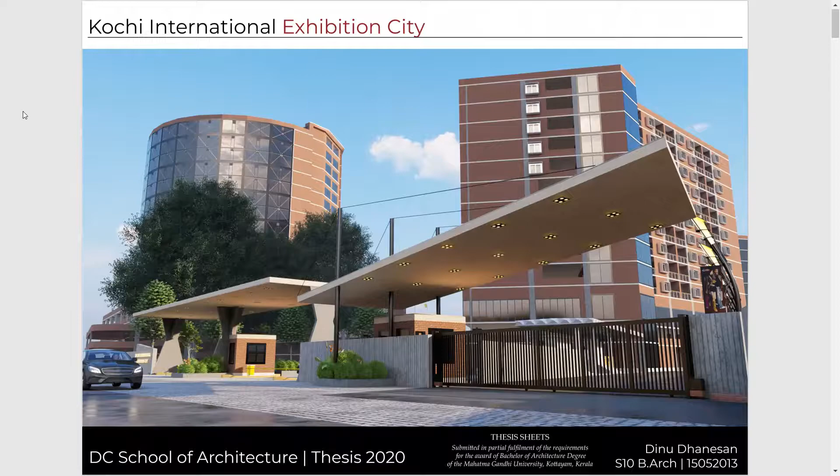The Kochi International Exhibition City is a live project proposal by the KSHB, also known as the Kerala State Housing Board, under the Government of Kerala.

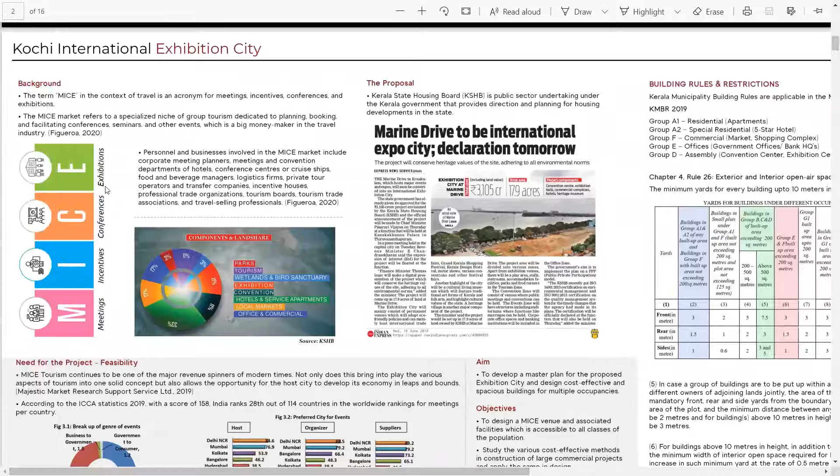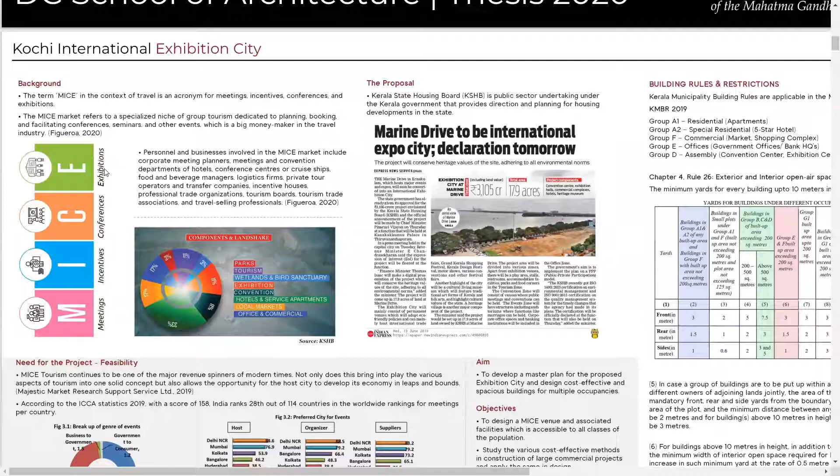It is a tourism-based project which comes under the MICE, also known as the Meetings, Incentives, Conferences, Exhibitions Market. The key components of this project as proposed by the KSHB include convention center, exhibition halls, commercial complexes, hotels, museums, serviced apartments, parks, etc.

Need of the project: MICE tourism is one of the major revenue generators of modern times. India is ranked 28th out of 114 countries by the International Congress and Convention Association for meetings and per country. Kochi is referred to as the commercial capital of Kerala and is becoming a sought-after MICE destination of South India. Owing to the rising demand and absence of such multifaceted large-scale developments, the KIEC, once realized, can expand the possibilities of MICE tourism in Kochi and the country as a whole.

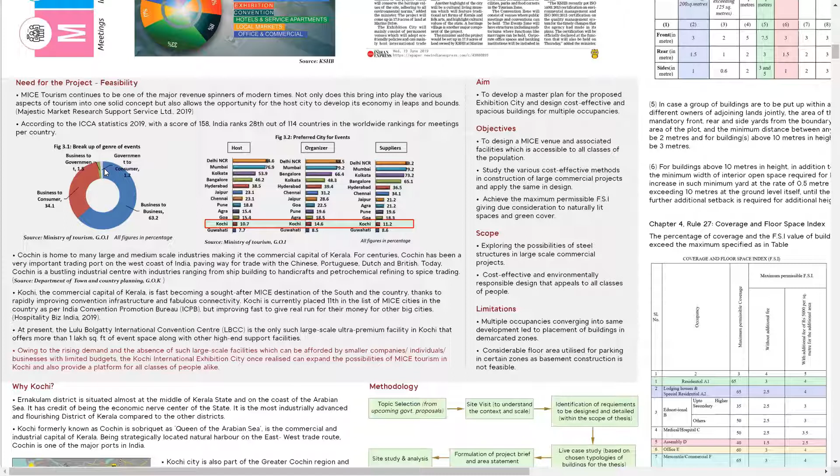So my aim is to develop a master plan for the proposed exhibition city and design cost-effective and spacious buildings, namely the residential, office, and exhibition centers.

The Kerala municipality building rules applies to this project, and these rules are considered pertaining to various occupancies, and the project is taken into consideration.

Coming to the case studies for the residential development, the first one is the Humanscapes Habitat, which is a community-based collective housing project based on co-housing concept in Auroville. It is a mixed-use development consisting of residences, community spaces, and workspaces. Some of the key inferences from this project include use of shared facilities.

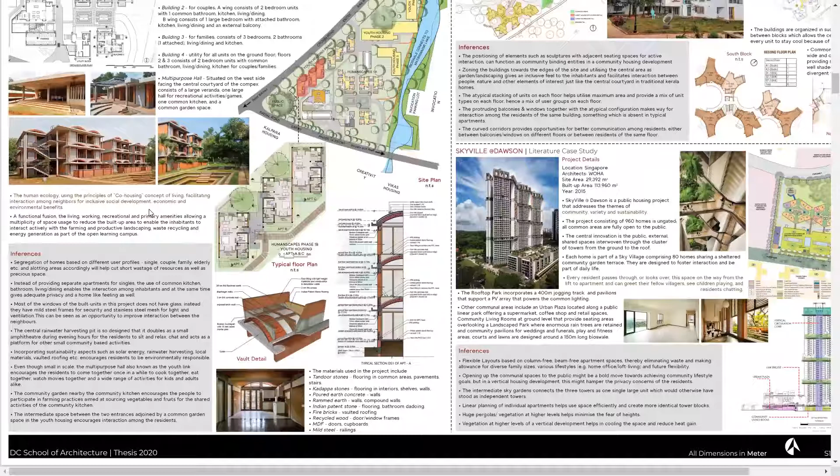Other inferences include segregation of built units for different user groups, and sustainability aspects such as solar energy, rainwater harvesting, and use of local materials. The second case study is Kalpana Housing, which is again a community housing project in Auroville.

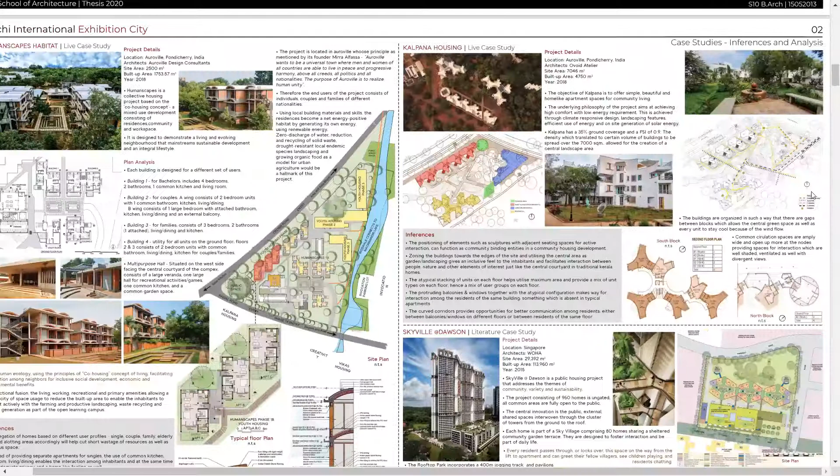One of the key inferences from this case study is the zoning of the built environments towards the edge of the site, thus creating a green oasis in the middle of the site which is pedestrianized and acts as a communal garden. The literature case study for the residential part is SkyVille at Dawson in Singapore.

It is a multi-story ungated public housing project which addresses the themes of community and sustainability. Key inferences from this case study include flexible layouts for apartments that are beam and column free, sky terraces, and communal spaces in between floors, and a rooftop park that is open to the public.

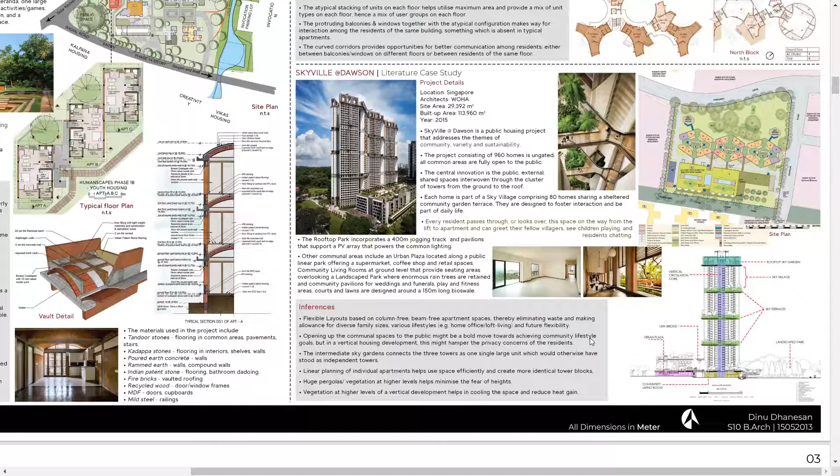In the comparative analysis, some of the key inferences or takeaways are zoning the built environment units in such a way that the green spaces are enclosed, and pedestrianized and shaded walkways or plazas are brought in between in the zoning.

Communal spaces along with horizontal access ways, circulation paths, etc. are provided. Visual connectivity within the building from different floors, and provision for natural light and ventilation in common spaces, etc.

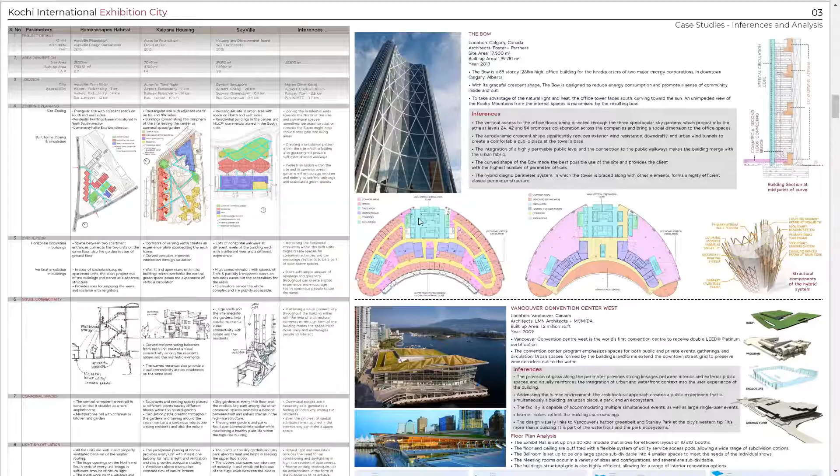The literature case study for the office tower is a 58-story office building in Canada called the Bow. The key inference from this crescent-shaped vertical tower is its hybrid diagrid perimeter system and the three intermediate communal areas.

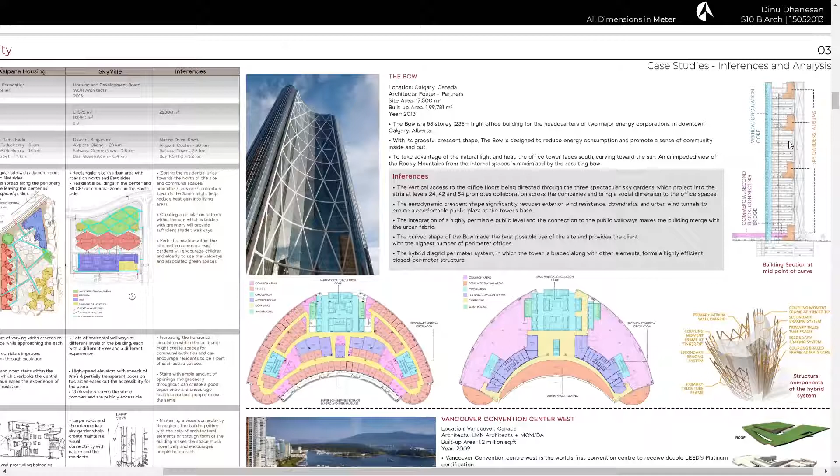The literature case study for the exhibition center is Vancouver Convention Center West, also known as VCC West. It is a 1.2 million square feet facility in which the architectural approach creates a public experience that is simultaneously a building, an urban place, a park, and an ecosystem.

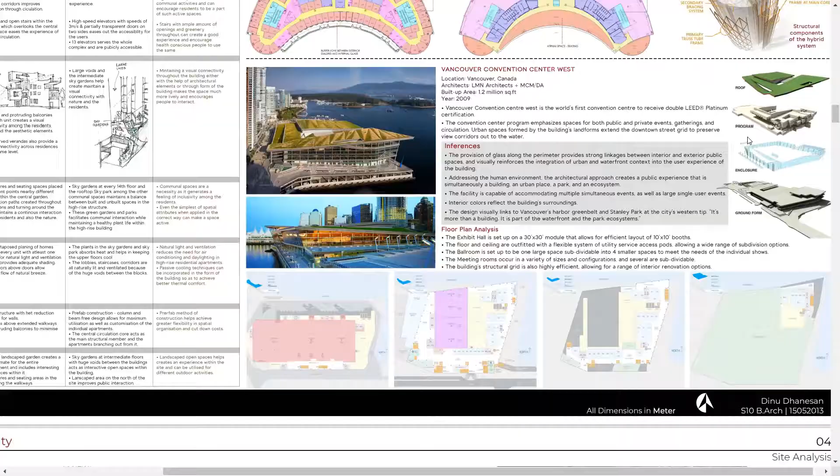Coming to the site, it is located at the Marine Drive in Kochi City in Ernakulam district. It is a connected site with all major modes of transportation within a maximum of 30 kilometers. Total site area is 17.9 acres, and this includes

almost 2 acres of mangroves, which comes under the CRZ1 buffer zone. It is a flat site with an average elevation of 4 meters above sea level. The existing vegetation in the site includes shrubs and trees belonging to the acacia family, Albizia lebbek trees, and

coconut trees. Since it's only 185 meters from the Kochi backwaters, the prevailing winds from the west and southwest are in abundance. There is a 10-meter wide city road running along the west edge of the site, and hence the entry exit to and from the site is located at the west.

Buildings in the immediate surroundings of the site include a petrol pump, a 2-story cultural building, and a 14-story residential tower, all in the southwest of the site. Good amount of sunlight and fresh air year-round is a major strength of the site.

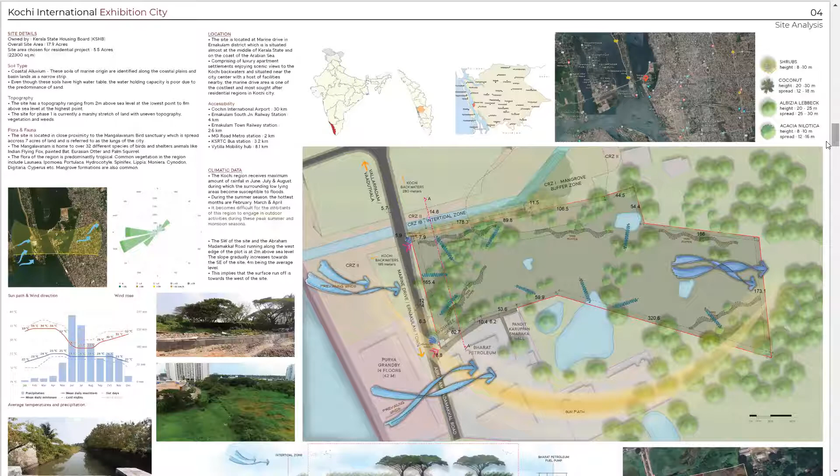Coming to the design program and the design brief. Since the original proposal is in its nascent stages, the exact area requirements and design brief were arrived at using a comparative study of areas of similar projects and case studies.

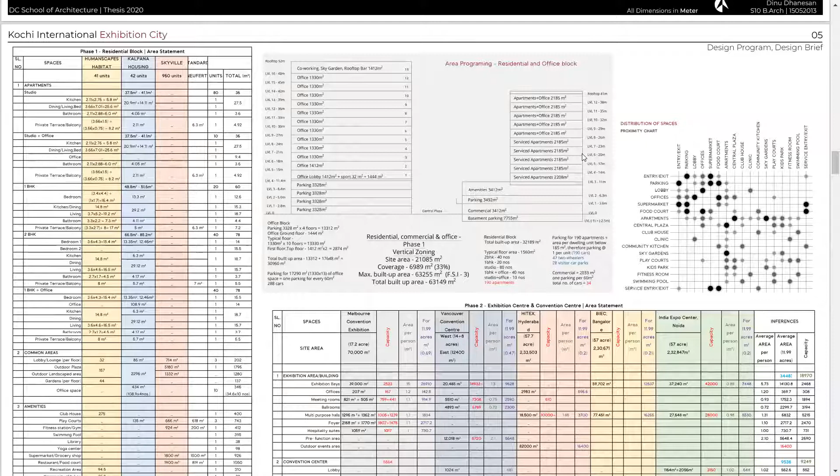Since the project is in Marine Drive, which is a premium locality, and the land prices are very high, due consideration was given to the area programming so as to achieve a design with areas similar to the maximum permissible FSI and coverage. At the same time, providing adequate amount of green spaces and public plazas were considered.

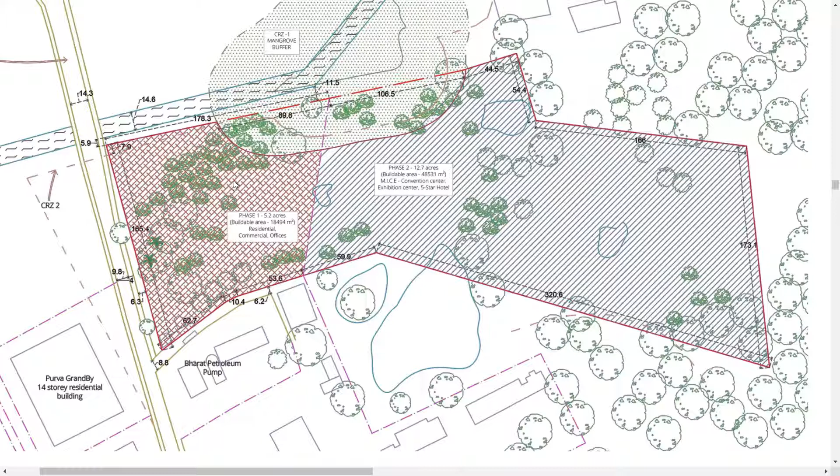Coming to the conceptual development at site zoning. In the basic site zoning, schematic site zoning, the site is divided into two phases, phase 1 and phase 2. Phase 1 is 5.2 acres and consists of the residential, commercial, and office spaces. Phase 2 is 12.7 acres and consists of the convention center, exhibition center, and 5-star hotel.

In the basic schematic master plan, the heritage plus cultural village, gardens, parks, etc. are zoned within the CRZ1 mangrove buffer zone, so that there are no built structures in this area, and also these areas can be used.

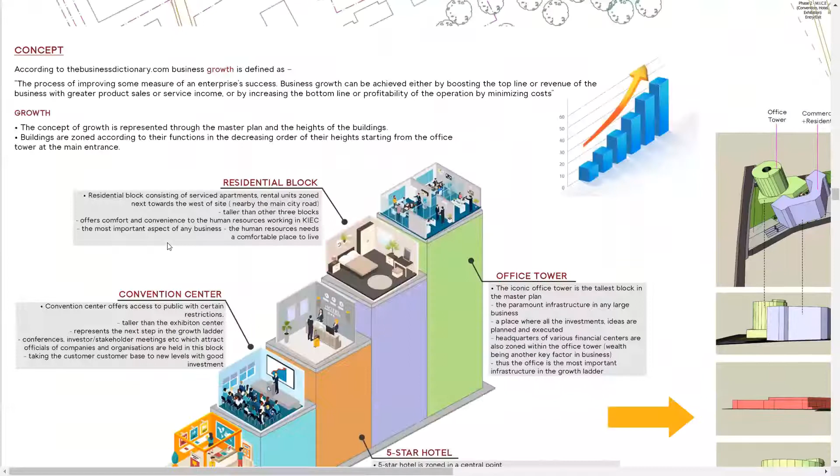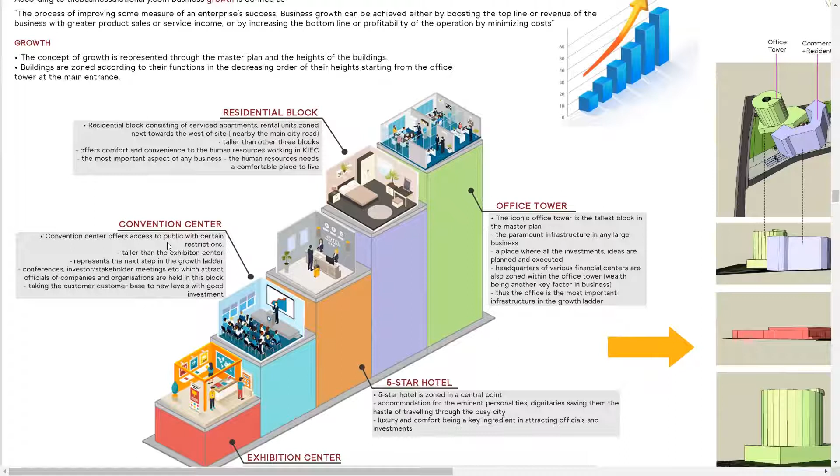The concept, zoning, and heights of the buildings are in accordance with the concept of growth. Growth is a widely used parameter in all businesses. Since Kochi International Exhibition City is a business venue, the concept applies to the same. Starting from the exhibition center at the east, the building heights gradually increase to the westernmost office tower, which is the tallest. The heights represent the infographic of growth.

As we can see from the massing study, the heights gradually increase from the exhibition center to the office tower in the west.

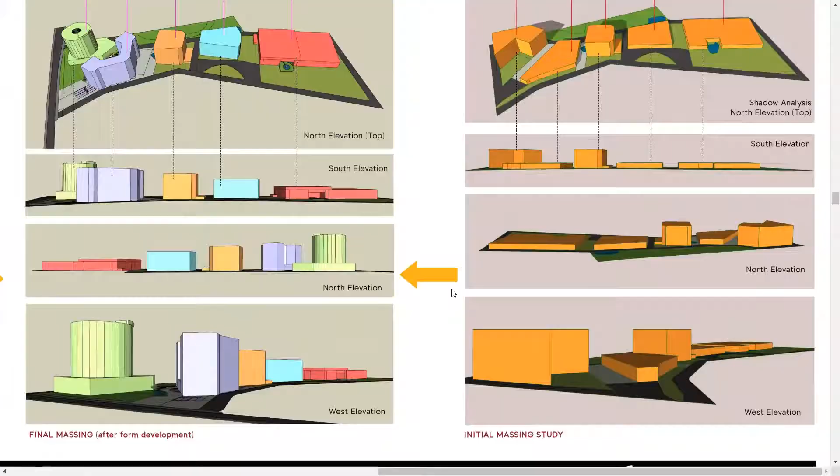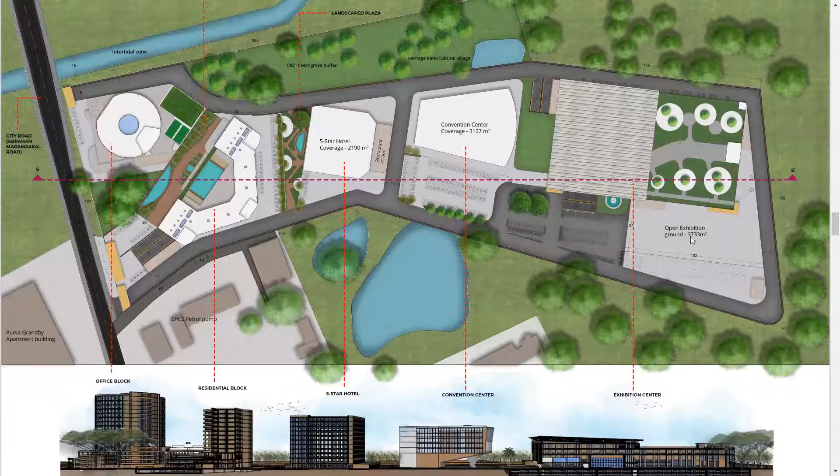Coming to the details of the master plan. This first one shows the existing vegetation and the CRZ buffer zone area, the park area, etc. All of the existing trees have been retained within the site, and only a single tree from the area near the office tower has been removed.

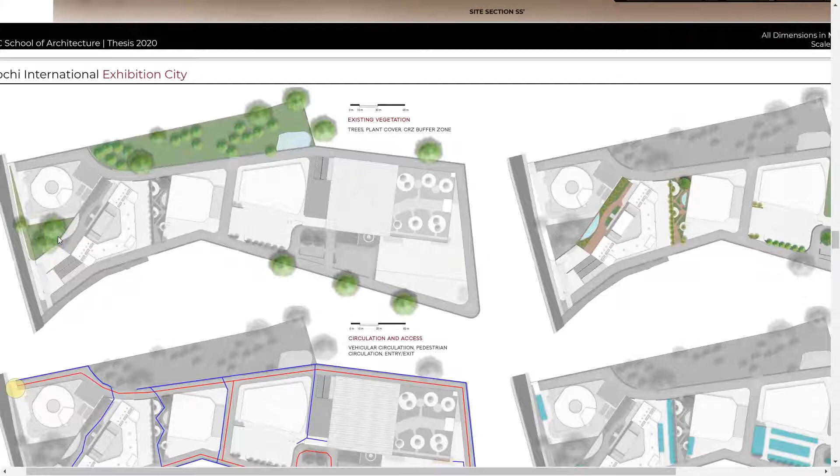This is the landscaped spaces of the plazas, which have been additionally added to the site. This is the public plaza between the office tower and the residential block. Then this is the landscape plaza consisting of seating areas, walkways, etc. between the residential block and the 5-star hotel.

This is the green lawn, and this is the rooftop of the exhibition center, which is again a landscaped meeting area.

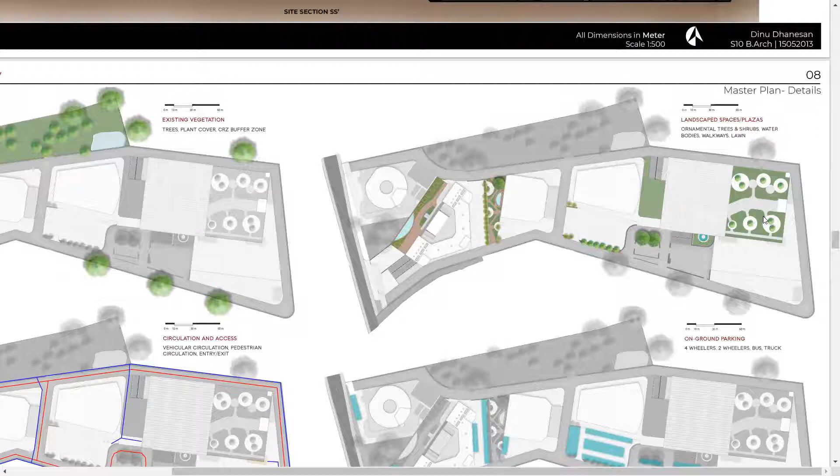Circulation and access points: there are 3 main access points to and from the site adjacent to the city road, and there is vehicular circulation throughout the site. There is a periphery road running along the periphery of the site, and there are certain areas which are pedestrianized, restricted to pedestrians only, such as this plaza, this landscaped area, and this lawn.

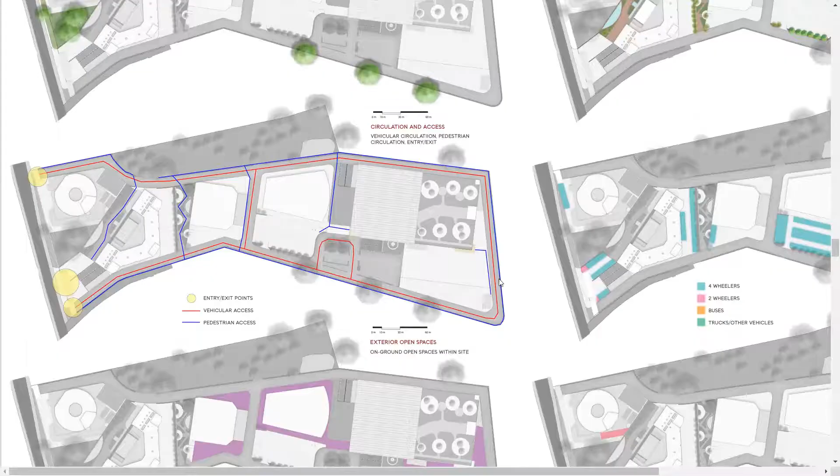This shows the on-ground parking spaces, that is for 4-wheelers, 2-wheelers, buses, and trucks.

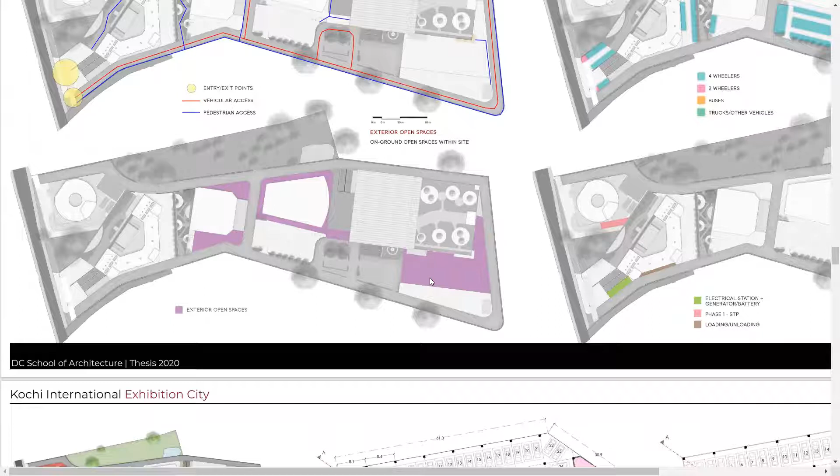This one shows the exterior open spaces, as on-ground open spaces within the site. There's a large open space adjacent to the exhibition center, which can be used for other open functions and also for truck parking, etc.

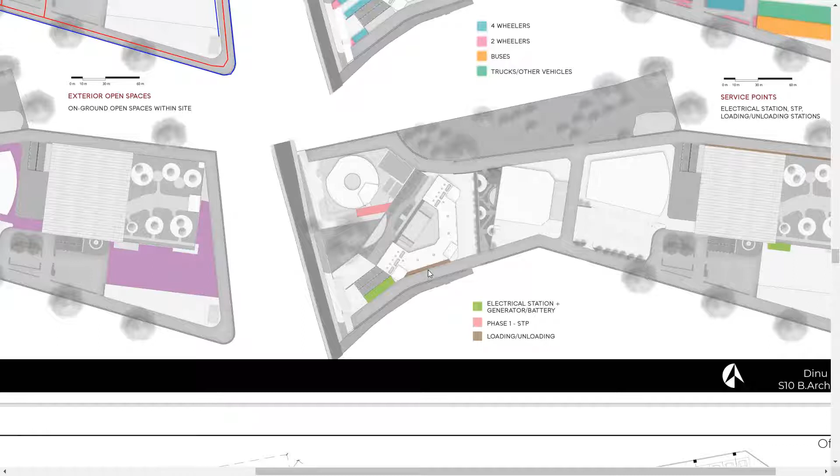This is the service points, electrical stations, STP, loading and unloading stations, etc. This is the main electrical station. The generator plus battery is located here near the residential tower, and this is the STP for the office tower, for phase 1. The loading and unloading spaces are for the commercial establishment in the residential ground floor of the residential block, and for the exhibition center.

So these are the floor plans for the office block. This is the ground floor plan consisting of 78 car parks. This is the typical floor plan for levels 1 to 3, which consists of 70 car parks each.

This is the level 4 plan, which consists of office spaces on either side, a central seating area and open space, and also 2 toilet blocks. The play courts open to the public are also located on this floor.

The typical structural system of the office block consists of a reinforced concrete vertical circulation core and composite columns in the central portion and ring beams. And on the periphery, there is a diagrid structural bracing system.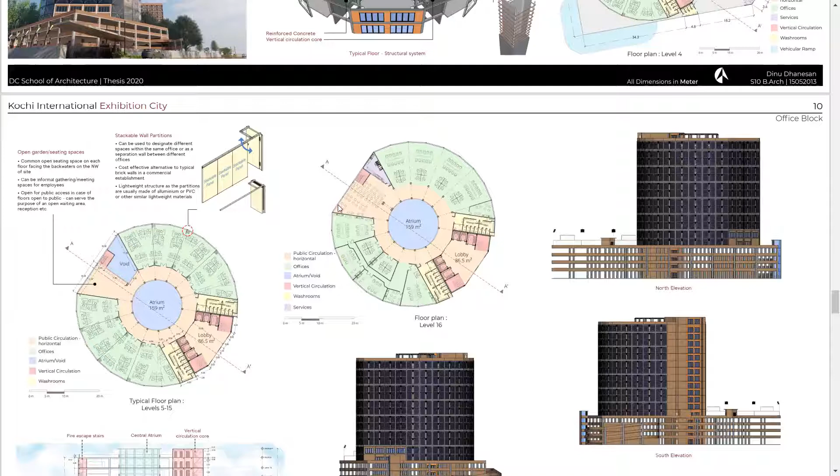Moving on to the residential block, this is the basement floor plan, which consists of 115 car parks. This is the ground floor plan, which consists of a supermarket and a food court, and also

the guest parking for 14 cars. This is the first floor plan of the residential block, which consists of 67 car parks.

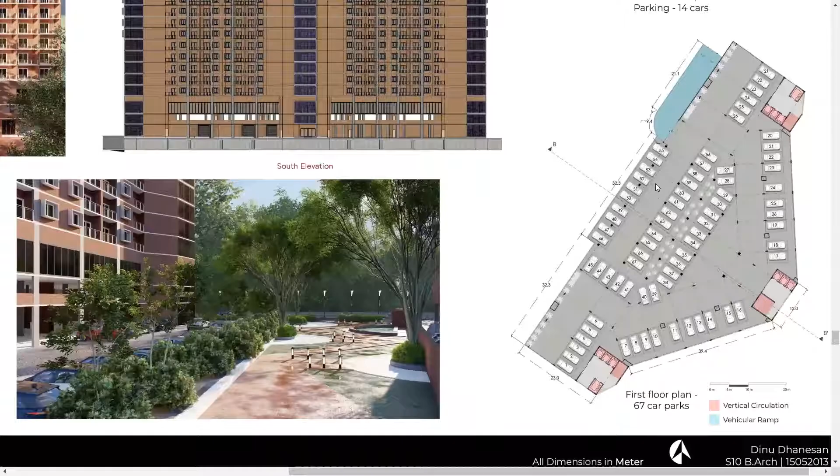This is the second floor plan of the residential block, which consists of communal spaces and services. The communal spaces include laundry, community kitchen, fitness center, swimming pool, clubhouse, yoga meditation center, library.

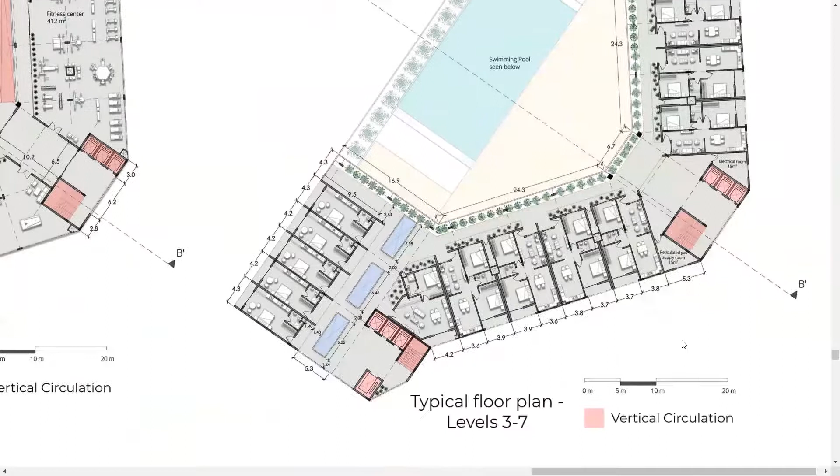The typical floor plan from levels 3 to 7 of the residential block consists of 8 2BHK units, 2 1BHK units, and 10 studio units.

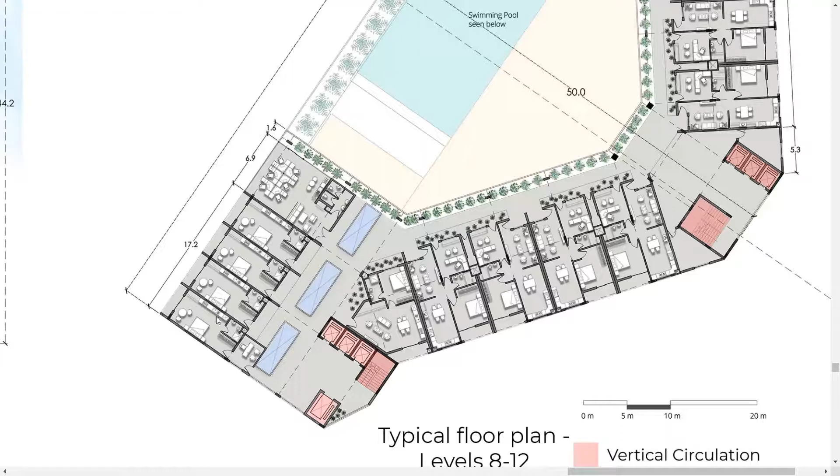This is the typical floor plan of levels 8 to 12 of the residential block, which consists of 1BHK units with attached office, about 8 in number, and 2 1BHK units and 8 studio units. There are also 2 additional co-working spaces on each floor.

Moving on to the exhibition center. These are the basement floor plans, which consist of car parks for over 1,100 cars. This is the ground floor plan, which consists of 3 large exhibition halls and a huge lobby, and also these exhibition halls have their own kiosks.

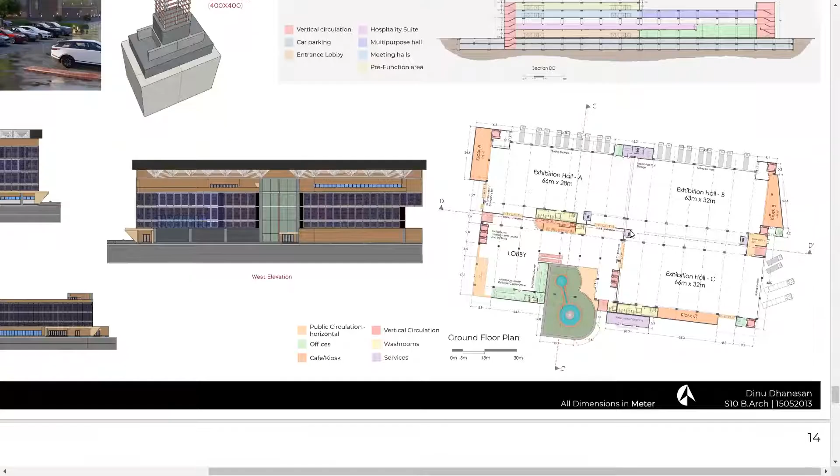This is the mezzanine floor plan of the exhibition hall. This consists of hospitality suites and organizers' offices.

This is the first floor plan. This consists of 3 multi-purpose halls, and one also doubles as a ballroom, and a huge pre-function area, which is actually shared by these 3 halls.

This is the second floor plan of the exhibition hall, which consists of a huge multi-purpose hall and also meeting rooms of varying capacities and sizes. There's also an open landscaped terrace, which acts as an open meeting space.

My special topic is building integrated photovoltaics. We all know that with the ever-increasing rate of global energy demand, buildings, both residential and commercial, are the major sources of energy consumption compared to any other sector. India also has high solar energy potential due to its geographic location and climatic conditions.

So the photovoltaic curtain walls allow buildings to generate additional power without compromising aesthetics, functionality, and views. They also provide thermal comfort and avoid the greenhouse effect. By avoiding the cost of conventional materials, the incremental cost of photovoltaics is reduced and its life cycle cost is improved.

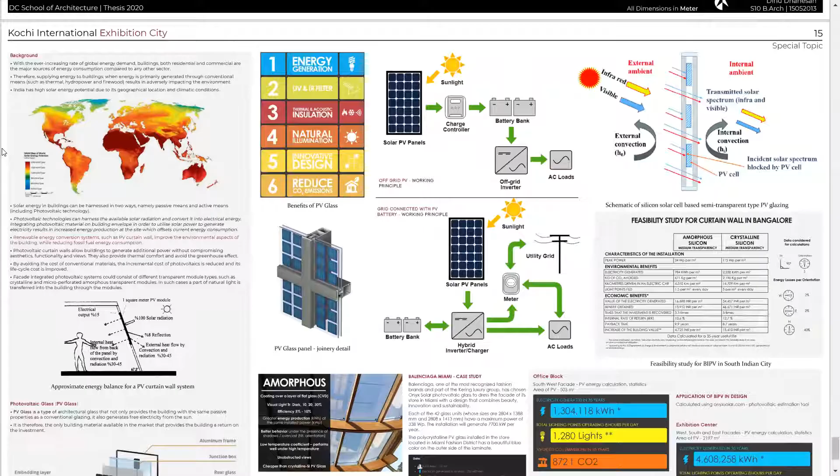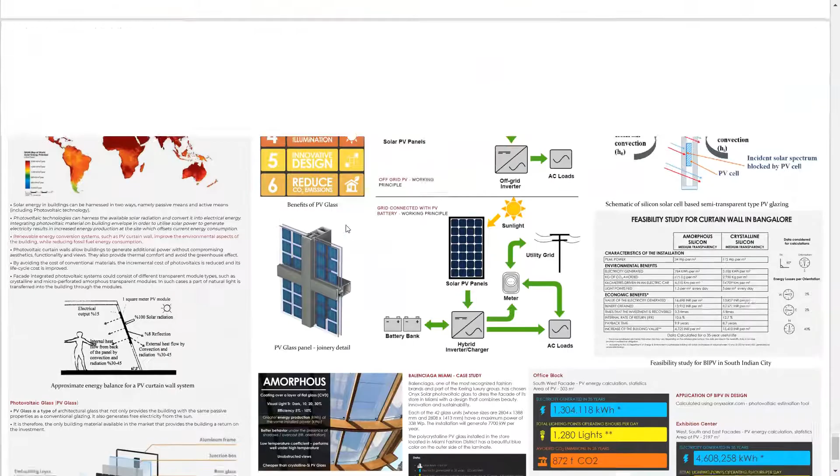So the photovoltaic glass is a type of architectural glass that not only provides the building with the same passive properties as conventional glazing, but also generates electricity from the sun. Some benefits of PV glass include energy generation, UV and IR filtering, thermal and acoustic insulation, natural illumination, innovative design, and reduction of CO2 emissions.

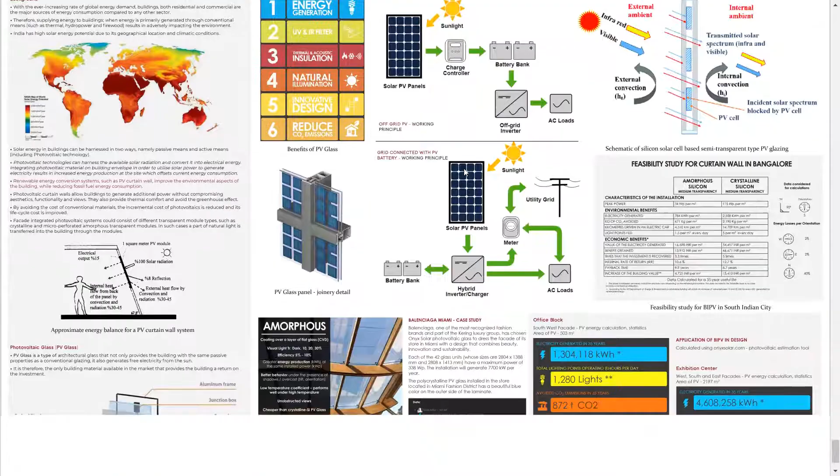There are 2 types of photovoltaic glasses: amorphous silicon and crystalline silicon. Generally, crystalline silicon is more energy efficient than the amorphous one.

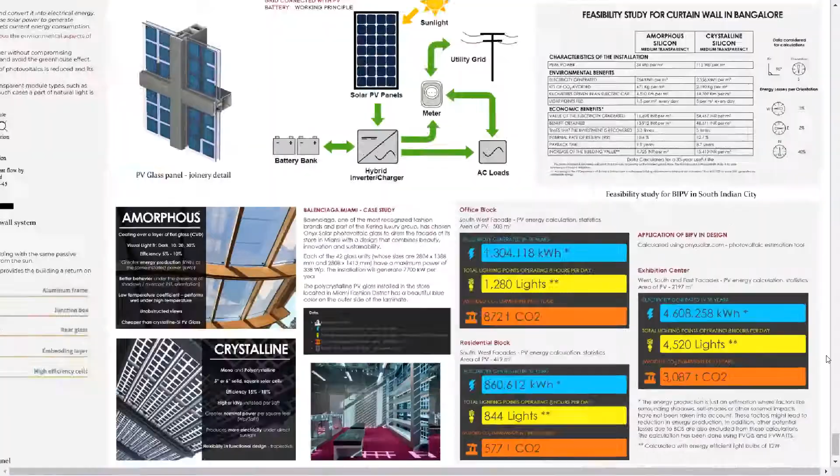So this is the application of BIPV in my design, and these are the calculated values from the BIPV curtain walls applied to the 3 different blocks: the office block, the residential block, and the exhibition center.